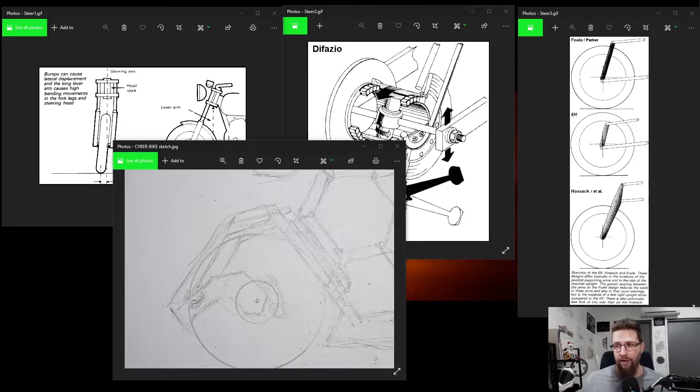Let's get into the different kinds of front ends you can have on motorbikes. Normally they're just forks, but the problem with forks is they do strange things when steering, going around corners, or braking, especially braking. It's called front end dive. When you're under braking going into a tight corner, all your weight pushes forward from the braking force, which compresses the front shocks. When the front shocks are under compression, they have less travel, and going through the corner, if there are any bumps or changes, you've got less travel for those shocks to do their job. Thus you get judder, and you can have slip outs where your front end falls out from under you. It's not good—there's a lot of problems with front end shocks related to cornering, braking, and stuff like that.

Here's a good image that shows how you get lateral displacement under certain conditions, and how your application of braking force puts the front shocks under compression.

There are lots of different problems that come with front end shocks, but they are very simple, easy to manufacture, and very common. They're all over the place—everybody uses them, that's why they're industry standard. But we're not going that way, because reasons. I don't know, sue me.

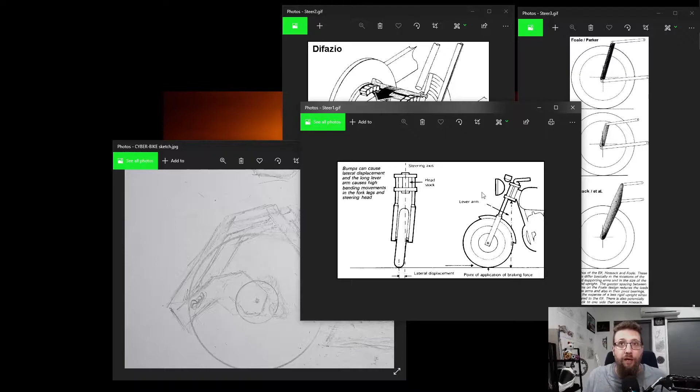No, just kidding—there are some really good reasons why we want to use a front end swing arm over a set of shocks or any of the other systems I've described. The main reason is the compression in braking, or front end dive when braking into a corner. The best way to explain how this works is to just show you.

When a bike with a front end swing arm starts braking, the majority of the braking forces travel directly through the swing arm, and very few of the forces actually travel through the shock. When you're braking, all of the mass is slightly higher up than the swing arm, so yes, there is a small amount of force that wants to dive the bike forward, to tilt it forward. But on the whole, most of the braking forces come through the swing arm and into the chassis, which stops the loading on the shocks.

That's the key reason: to prevent loading on the shocks into cornering, which means you can brake much harder coming into a corner and go around it with quite a bit more speed. Because when you're no longer braking, entering the corner, your shocks aren't compressed. They have a lot more travel, more play and give, which means you can attack the corner a lot harder than with a regular bike. You also aren't transitioning from having the mass in that dive position to not being in the dive position, so the whole transition through the corner remains a lot more stable because of this setup.

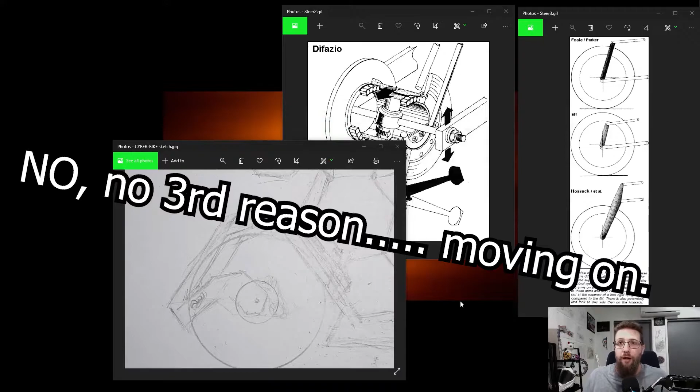Now, in the drawing, I was a little ambiguous with this scribbly mess, because I wasn't sure myself what I wanted to do. In my previous bike design, I used a hub-centered steering system.

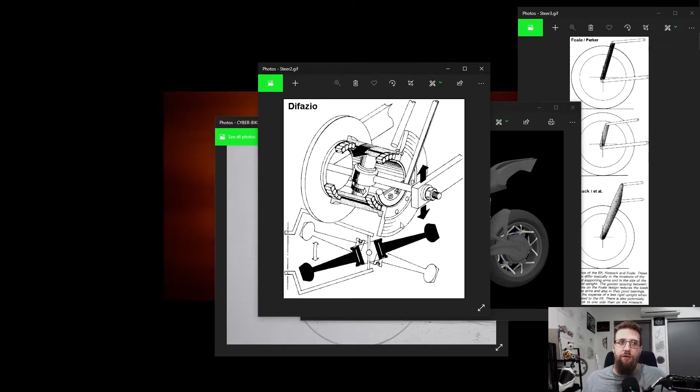This is a top-down view. You can see these are the two extremes of the tire, the cross-section of the tire, so the tire can turn between this angle. There's an axle that runs between the hub, which connects to the swing arms, and that hub is hollowed out, with this double hinge thing on the inside that allows the wheel to turn around this cross axle, which is this one here.

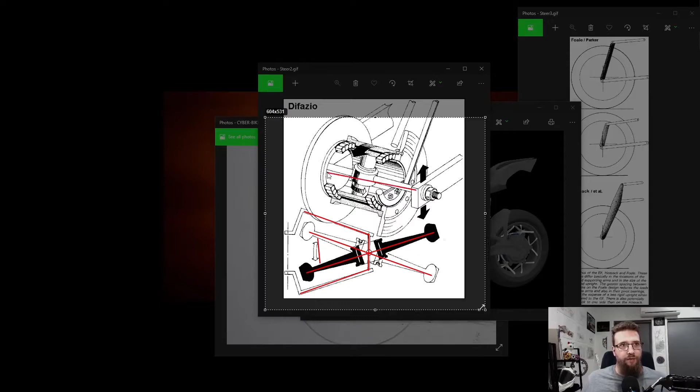So it's complicated, but it's a lot simpler than people think. It's actually pretty easy to design. That's what I used in this old bike design of mine, and I quite like it. It's very simple, not a huge issue.

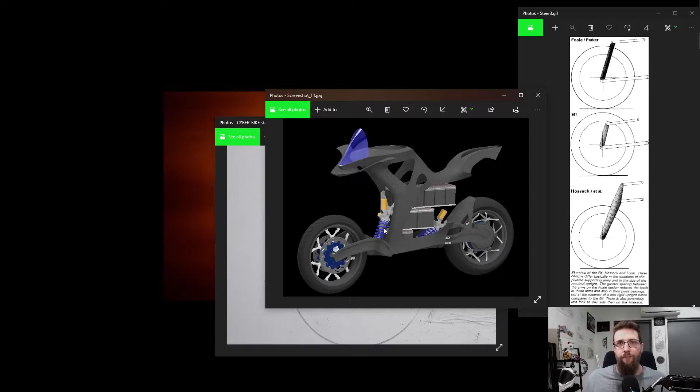I would have to go back and redesign the front rim. I'm thinking of redesigning both rims completely anyway, so this could be the pusher. If we go with hub-centered steering, we're going to have to redesign the rims, which I'm not opposed to. They look cool, but they're impossible to manufacture.

They would have to be laser sintered with metal printing. It's just not doable, but it's a concept bike. It's not actually going to get made, so I'll have very loose requirements on the design aspects. I can do what I want because it's the thing I'm doing.

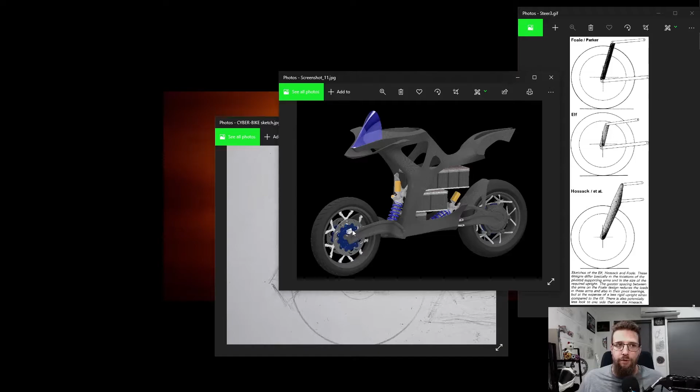So I'll probably have to redesign the rims, and we'll look at that at a later date. I'm leaning towards doing another hub-centered steering system because they're actually a lot simpler than using one of these three other parallelogram systems.

They're like a hybrid between a hub-centered steering and a shock, using the yoke and shock. These all rely on a parallelogram of a displaced yoke — it's like taking the shocks off the bike but keeping the steering bit, the yoke, the part where the shocks rotate around on the steering axis, removing that from the frame of the bike and putting it on a parallelogram, then putting a shock inside the parallelogram. The thing with the two sticks that pivot on both sides.

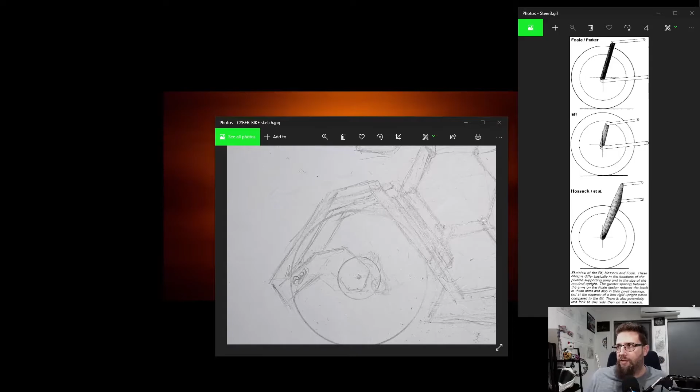So that's basically taking the yoke of a front-end steering shock system and displacing it from the bike using parallelograms. There are three different variants: the Parker, the Elf, and the Hossack. These have shown up in various forms throughout the years. I found a really nice old image of a BMW — this would be an Elf system.

You can see here you've got your parallelogram running from below the shock to the frame, and you have the secondary one here. This here is your yoke and your steering axis, and then you have this linkage which goes through a series of linkages up to the handlebars, controlling your steering mechanism. This old BMW also had a perimeter brake disc, so these have been around a while — it just goes to show this isn't new stuff.

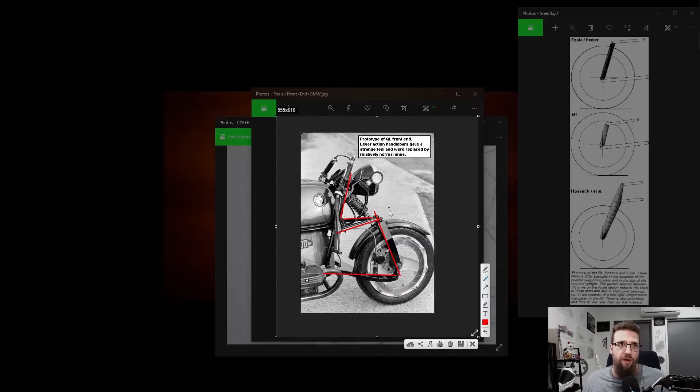Nobody has a patent on them. A few motorcycle manufacturers have patented their own steering systems, but they're patenting specific aspects of how their system works, not the concept or function as a whole — that's a key distinction to make. It's the same with Eric Buell's perimeter disc patent. His patent was specifically for how the perimeter disc attaches to the rim and how the rim is designed. Even his patent has a lot of discussion about its validity and legality, because it's vague, and many of the claims in the patent are things that have been done before, so he couldn't necessarily patent them, and it wouldn't hold up in court.

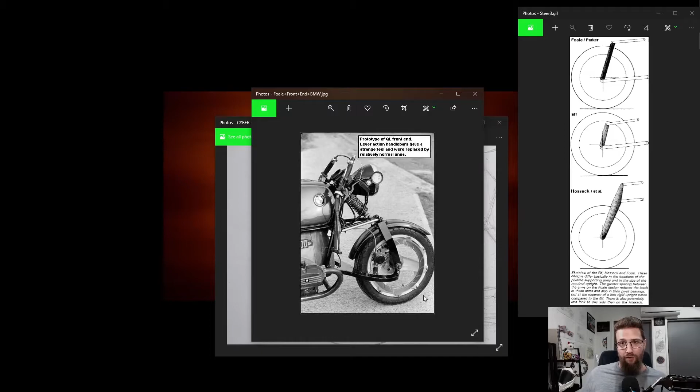If you tried to take somebody to court for doing something, it wouldn't hold up because it's been done previously. It's not a novel concept. That's the one I was looking for, novel concept. Now, what else we got?

We've also got this. This is of a Honda. I think this is a custom built. This would be a Hossack.

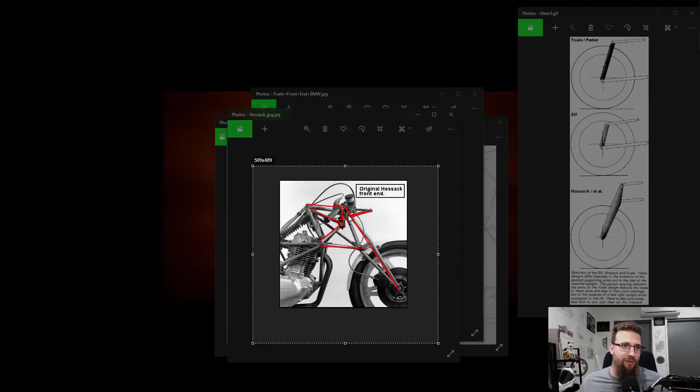So with this one, the way it works is your steering axis is here, and the parallelogram runs off here, and then you'd stick your shock in somewhere here. Your handlebars are still attached directly to your steering axis, and you're feeling the shock. Your handlebars would actually move independent of the bike frame, unless they've got it separated here by these. They do. So yeah, the handlebar stays separate, and then there's this linkage here which attaches to the steering axis. So there's another example of a steering geometry setup.

There's been all sorts, there's so many. This one, I'm not sure, I think this was a custom built bike. So this is a front end, a hub centered steering. The steering geometry is within the hub, but it is a combination, like a hybrid system, a combination of the Elf system and hub centered steering.

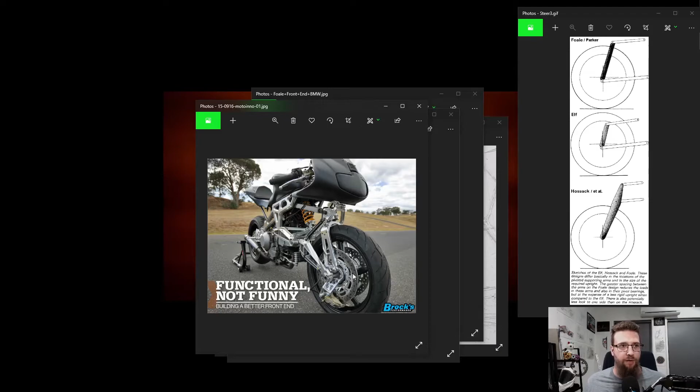The steering is happening on the inside. Your swing arm is fixed. So the bit that holds the wheel to the frame is fixed, it doesn't rotate. And that's the distinction between these setups and this setup.

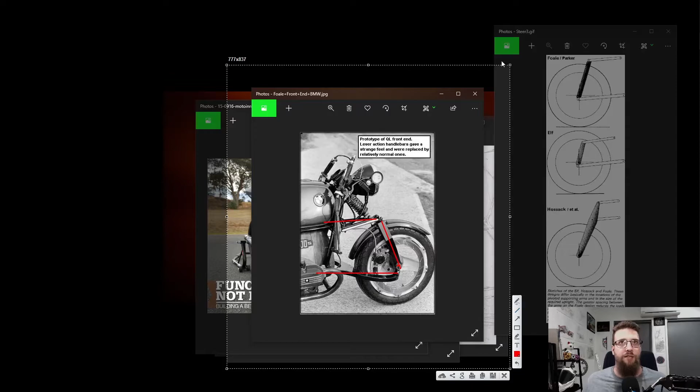With this setup, the bit that holds the tire to the frame is this bit here, and it's not directly attached to the frame. It's then attached through two more linkages that have a rotational axis, whereas with this one, the steering axis is here, but the bit that holds the wheel to the frame is fixed. There's no steering axis on it. There's an additional control axis which handles the steering that is separated out.

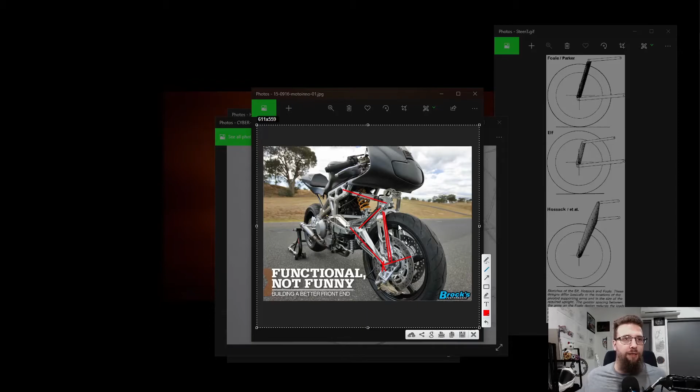This is an overly complicated system. I don't know. My favorite one that's been done to date has been done by, there's two of them, two motorcycle makers that have made some really pretty front end steering systems. This is both Italian, believe it or not.

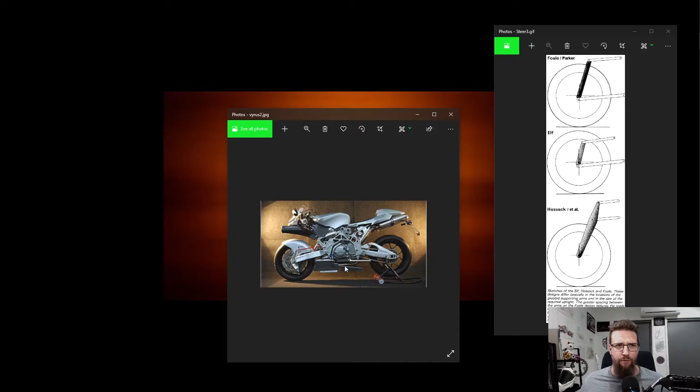This is the Vyrus motorcycle by Vyrus Motorcycles. Now what they do is they have a very interesting business concept. They design the bike, the frame, the cradle as they call it, and everything, but the motor is from another bike. So if you have a bike with a motor that you really like, you can say, hey, I would like my Vyrus to have this Honda engine, or I would like to have a Yamaha engine. And they have different cradles that hold the different kinds of engines. So you can have a 600, or an 1100, all sorts of different things. They also come standard with a Ducati motor that you can buy, they sell them as is. So there's the Italian Vyrus motorcycles.

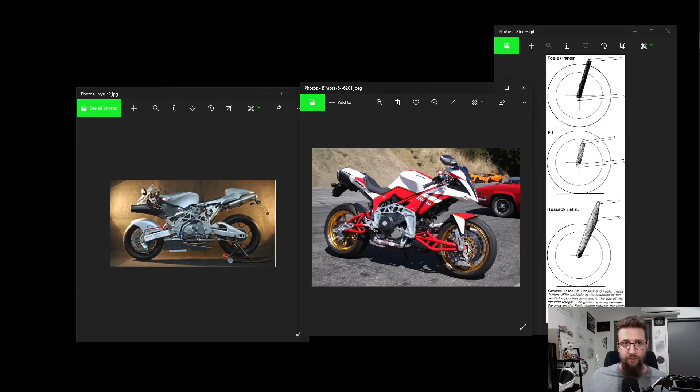And then there was the Bimota. The Bimota is also a really nice Italian motorcycle. They also use the front end swing arm. It's very simple. You have a parallelogram that prevents your steering axis from rotating on the front end swing arm, and then you have an additional linkage that controls the actual steering axis.

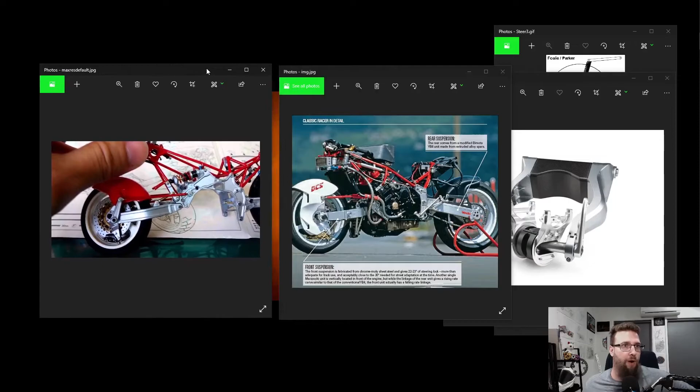So if we were to look at this image here and try to explain how it relates to the Bimota, let's focus on the Bimota. These are three different images of the Bimota front end swing arm. This is a model kit that you can put together. I'm actually going to see if I can find this model kit and buy it because it looks really cool. There are three main components to hub-centered steering, and we'll use this — this is a Bimota hub center unit. So you have three points of control: you have your main swing arm.

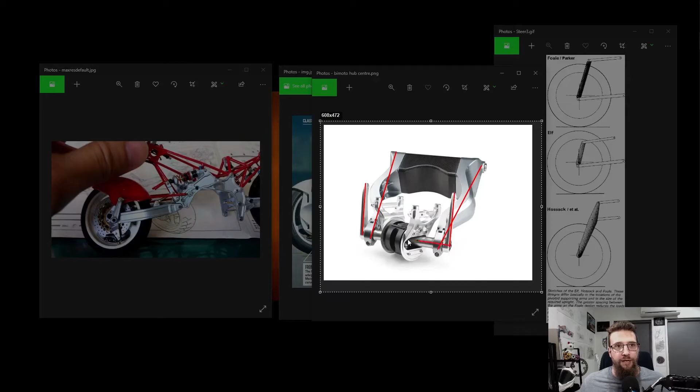This is what controls your shock dampening and your movement of the wheel up and down. Then you have your parallelogram, which is these bars here. These control your rake angle. Rake angle is the angle at which the steering axis relates to the motorcycle front and back.

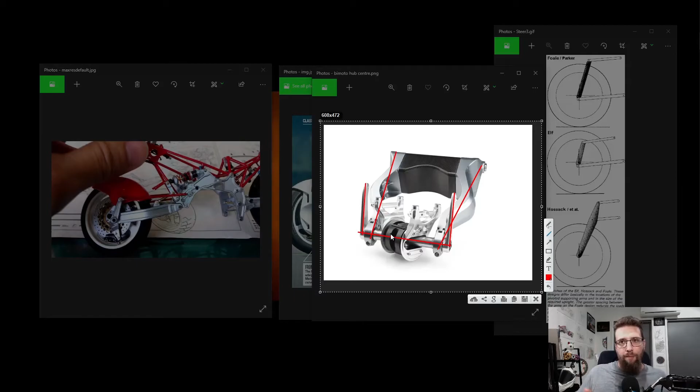You don't want your steering axis to be perfectly vertical, you'll end up with a lot of wobble. But you don't want it leaning too far back either, because then you lose steering capability. You'll see that with a lot of choppers, they've got a very extreme rake angle.

And when you turn the handlebars, they've got a really slow speed turning radius. The third aspect of hub-centered steering is your steering axis. These linkages control the angle of this in relation to perfectly vertical. They also keep that angle parallel to the motorcycle when it's going over a bump and your swing arm moves. The last part is your steering axis, which rotates on this axis here and is controlled by a linkage that comes off on either side depending on the design.

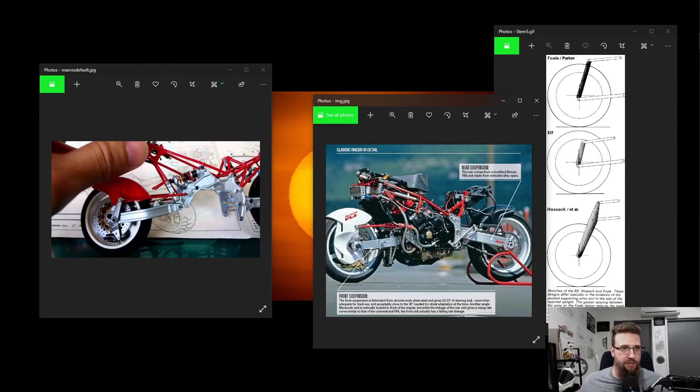The Bimota one, their steering control is done like this - here you can see this linkage controls the steering. These are my options: we can go hub-centered steering, we can go hybrid like with this one, or like this one.

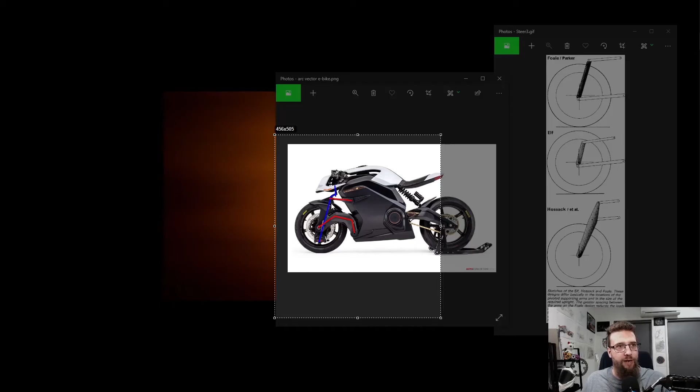This is a hub-centered steering design, but their steering is controlled through a linkage that comes down from the top here, and the parallelogram that controls the rake angle is up top here. Steering axis shown in blue - it's controlled with these linkages, and you've got your swing arm here, and the parallelogram that controls your rake angle is here. Yeah, this is a very elegant design.

We're going to go with something similar to this, but not exactly. I don't like this dropping down from the handlebars, I don't know why, I've just never liked it. There's so many linkages in that have to move with the shock and the whole swing arm. I don't like it, and it looks ugly having these weird fiddly bits hanging out. I'd much rather have a linkage that comes off to the side and then runs up with the frame of the bike to the handlebar.

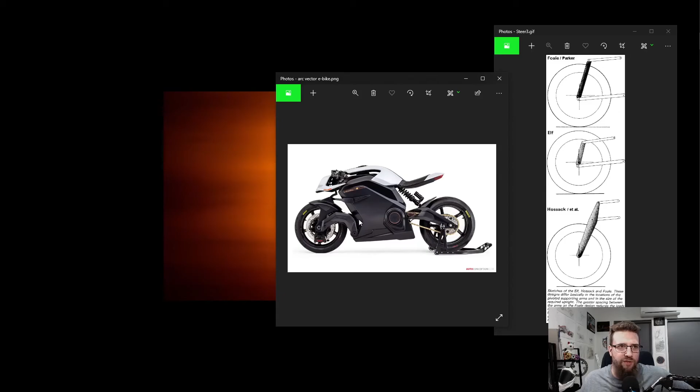So that just about covers it, there's a lot. Again, engineering is beautiful. I love engineering, especially when you start getting into things that have been around for a while - aircraft, motorcycles, cars, even just simple stuff. There's so much history and information for you to discover, why things are the way they are and how they work. I really love that about engineering, that's why I do this, that's why I love this, that's why I'm so passionate about this sort of thing.

So we just covered a whole load about swing arms, front end shocks, and hybrids - all the different variants you can arrange these things into to get the same result. You just want to steer the front wheel, but there's 1,000 ways to skin a cat.

We'll leave that there for today's episode. We covered quite a lot today, and next episode we'll get into the actual CAD design of the front end swing arm. You'll get to see what I've done off camera, which is the linkages for the rear swing arm, and I'm going to look at doing the linkages for the brake calipers and how they're going to attach, but I want to get the front swing arm assembly done first. So until next episode, I'll see you guys later.